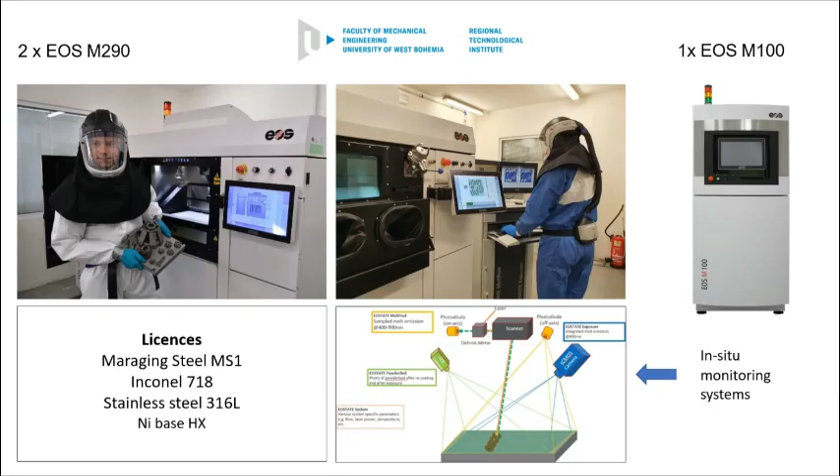We have a small international team in our research center, which is equipped with EOS equipment. We have open licenses for some metals. Our machine is equipped with in situ monitoring from EOS company, and we are developing our own in situ monitoring systems to understand the process more.

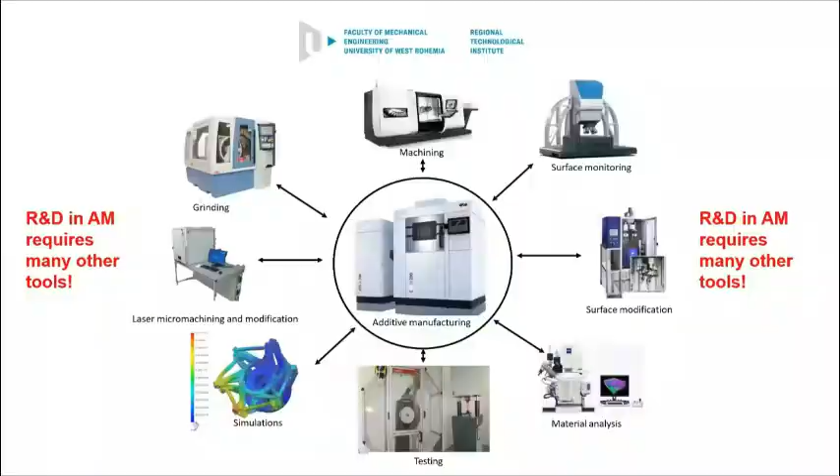For R&D, it's very important that we are able to collaborate with other labs in our RTI Research Institute, and we can collaborate on testing, investigating surface treatment, etc. Partnership is very important for us because our team is not too huge, and we need the collaboration.

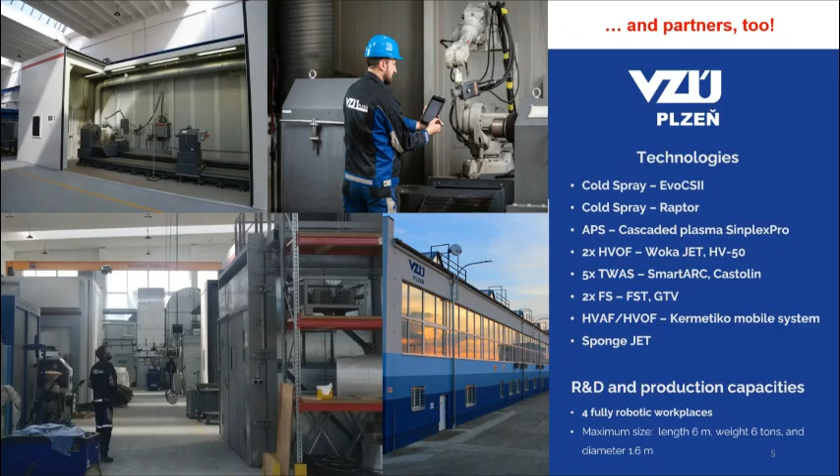Our local collaborating research institution is VZÚ Pilsen, translated as Research and Testing Institute. Pilsen is very well equipped for different industries, and one part of this is a department for thermal spraying, including all technologies for these processes, including the application of cold spray.

I will start with my idea. I tried to push to the European Commission because I think that some parts are or will be produced by additive manufacturing, and some of them will need improvement of surface for different reasons: to be harder, to be better in abrasion, to have some thermal barriers.

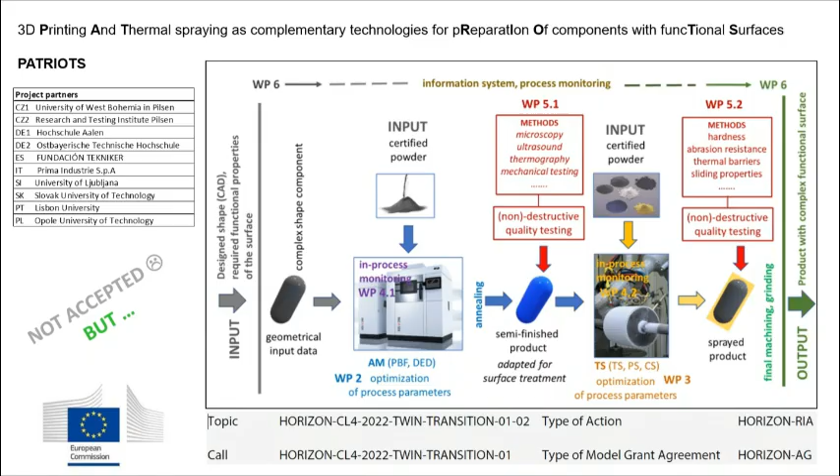The European Commission didn't accept our proposal, but we worked very hard on this topic, and we obtained money from a smaller European program, M-era.Net, with a smaller team composed of Pilsen, Germany, and Poland.

I will not comment on the result. You can find it on the website of this program and in some literature.

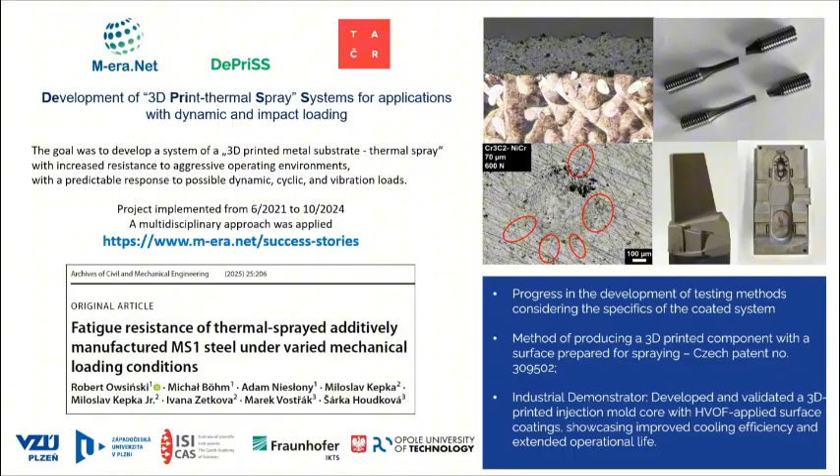Five years ago, Professor Nima Shamsaei from Auburn University visited us. We tried to develop some collaboration. We asked the Czech government for money, but the Czech government didn't accept our proposal.

But we used our internal money for this type of collaboration, and we performed investigation on Inconel 718, which was tested in fatigue, but test specimens had different various post-surface technologies we use at our RTI.

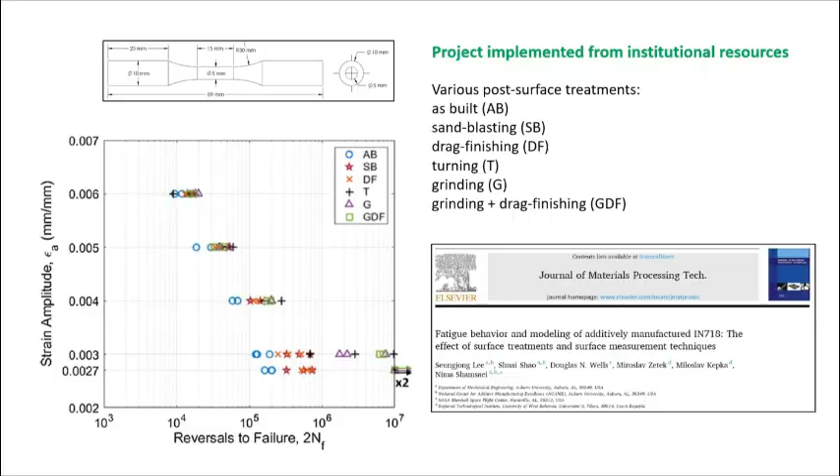In Trento, I discussed with Professor Nima that we would like to continue our collaboration. Maybe we will prepare something similar, an investigation, but with multi-axial loading.

Still, I think - not only I, but my friend Vladimir too - that multi-axiality is a very important aspect to investigate in additive manufactured components. Because to produce something by this technology and be economically in line with castings and forgings, components must have topological optimization. And a topologically optimized component will have a lot of notches, and some of them will be multi-axially loaded.

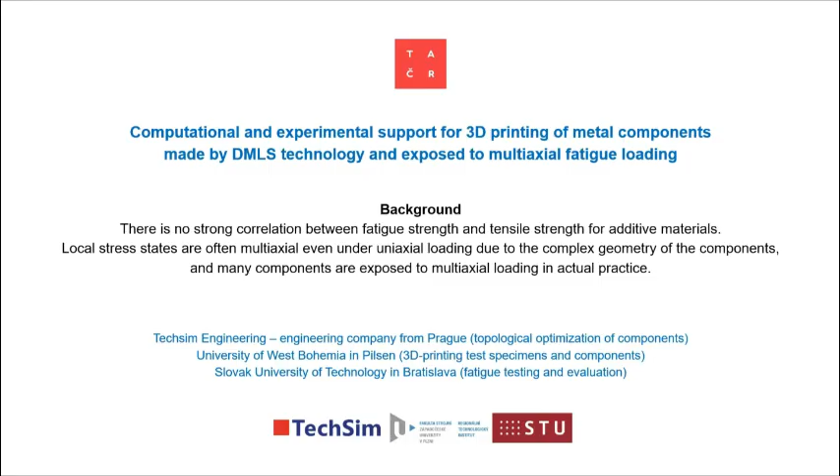We solved a small project together with the University in Bratislava. This workflow I showed, I think, 3 years ago in Porto, but we still haven't presented results in detail in any paper. Shortly, the project can be described as: we produced the test specimen, and tested the test specimen uniaxially, in torsion, and in different combinations.

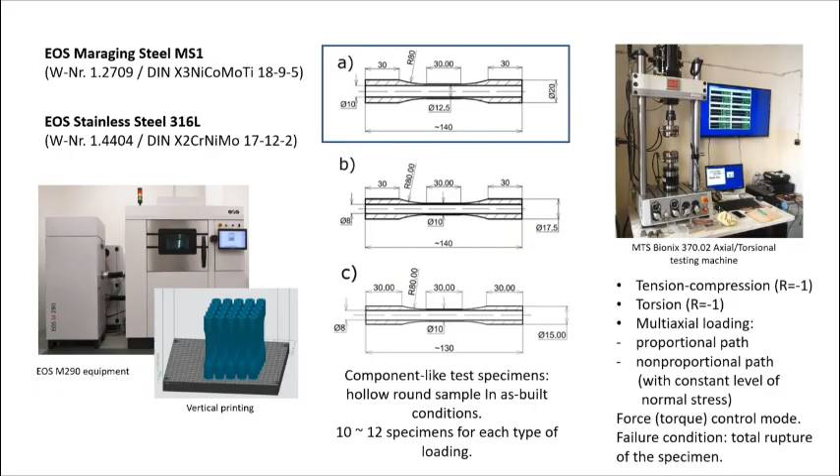Then we were able to compare experimentally and theoretically stated fatigue life and to evaluate different various multi-axial criteria, which are overestimating, underestimating, or in line with experimental results.

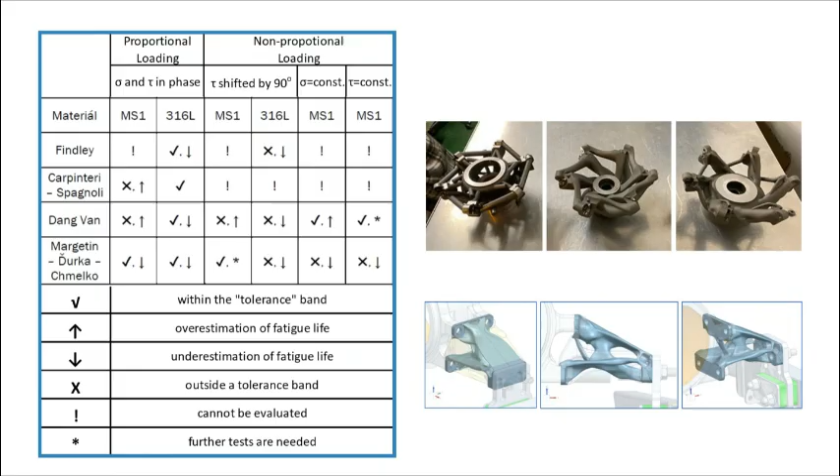Knowledge from the project we used with optimization of some industrially used components - some examples you can see in this picture.

Now we are preparing a lot of collaborations. I am preparing collaboration with Unisalerno. We will investigate the crack growth of CT specimens.

We are preparing collaboration with Uniparma. We would like to continue our project with Bratislava by testing the component, like test specimens, on our multi-axial test stand, and I hope that our friends from Parma will have the possibility to validate their new approach to multi-axial fatigue life prediction.

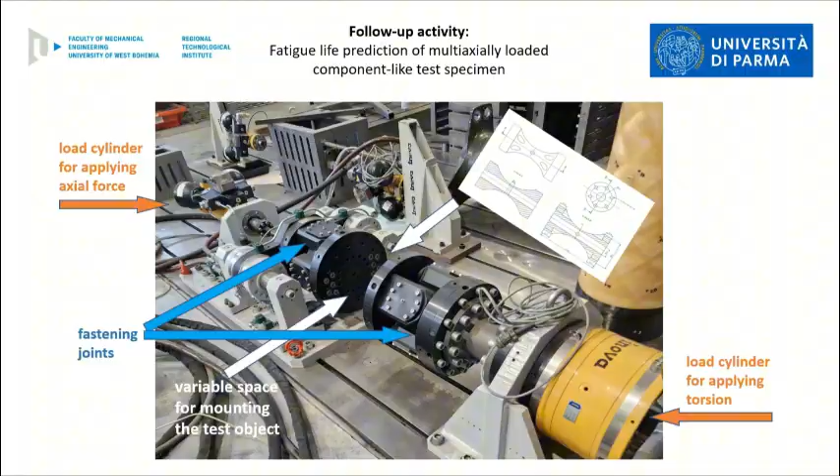And now I would like to ask my colleague to continue and to propose something.

Oh, sorry, this is not right.

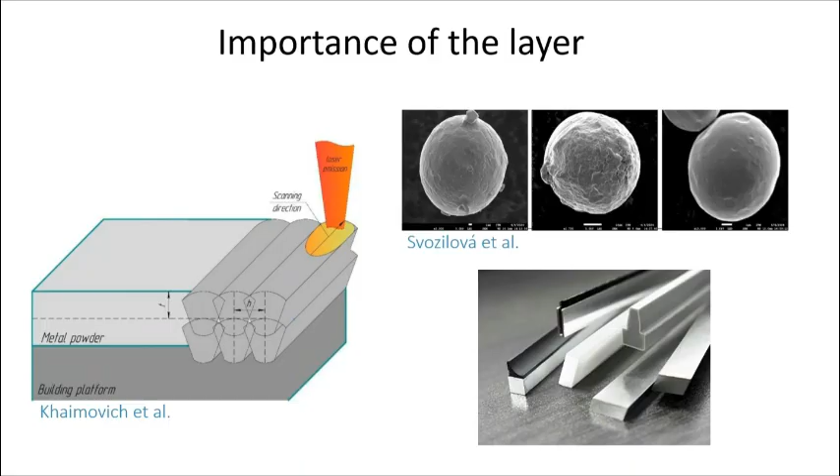As Mr. Kepka showed, we are using SLM machines where the quality of the printed part is given by several factors such as laser parameters and scanning strategies. There are differences when using new, used, or recycled powder, or when using hard or soft recoaters. This is all closely related to the field we are focusing on, specifically monitoring the powder bed, respectively monitoring the quality of the spread layer.

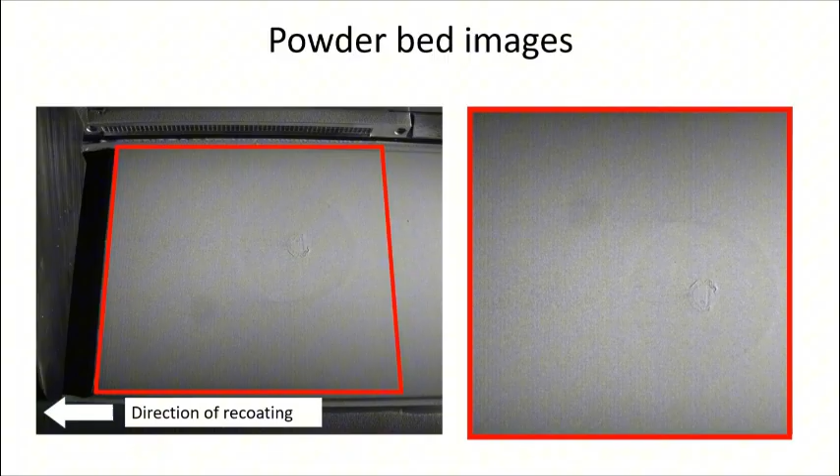In the following slides, I'll be using these images - basically top view cropped images of the powder bed. To make it clearer what we are working on, I will introduce some common defects occurring while spreading a new layer.

The first one occurs when the recoater is spreading the layer and hits some elevated part, resulting in vibrations that create patterns called waves - basically spots of thin and thick layers of powder.

Second, recoater streaking. This happens when the recoater blade itself is somehow damaged, when a small piece is chipped off, or when the recoater blade catches some debris or particle and spreads it along the platform.

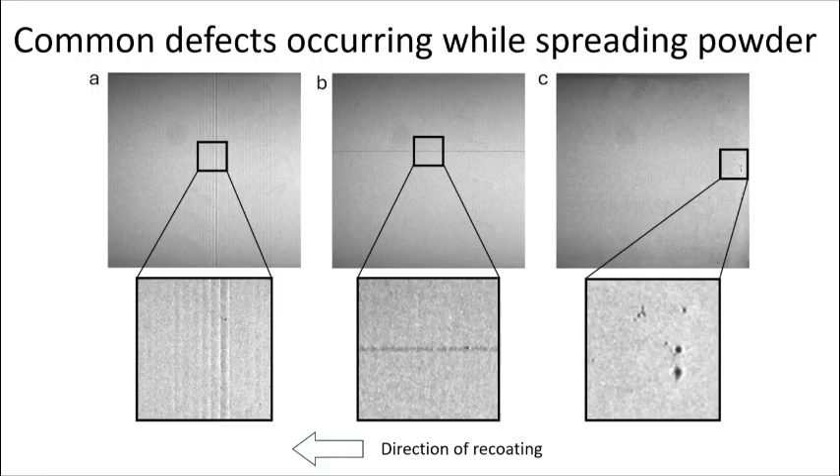And the last one - spots of missing powder - usually occurs on the edge of specific complex geometry. I also have an example.

So we decided to somehow screen or monitor this.

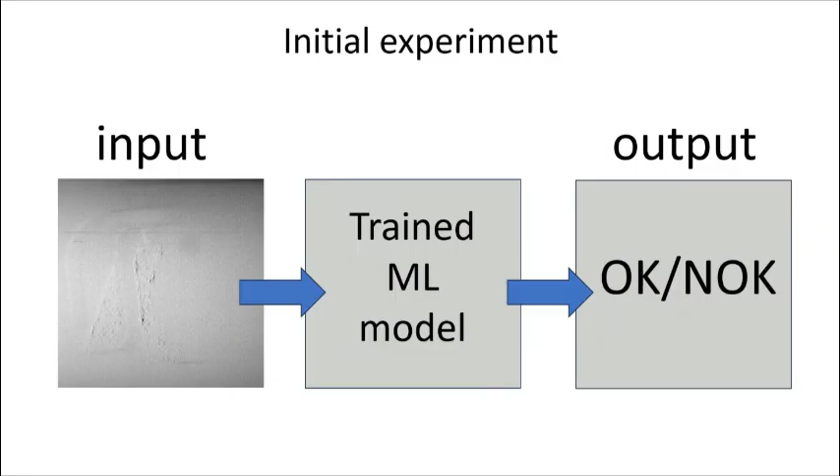In our initial experiment, we trained a model that performs binary classification of images. We have input images - these are images of the powder bed after recoating - and the model decides if the layer is well or not well spread. Here you can see some examples of well and not well spread layers.

We used in total over 2,000 images to train the model, reaching 97% accuracy. However, this approach doesn't count the position of the part on the platform, it doesn't count the position of the defects.

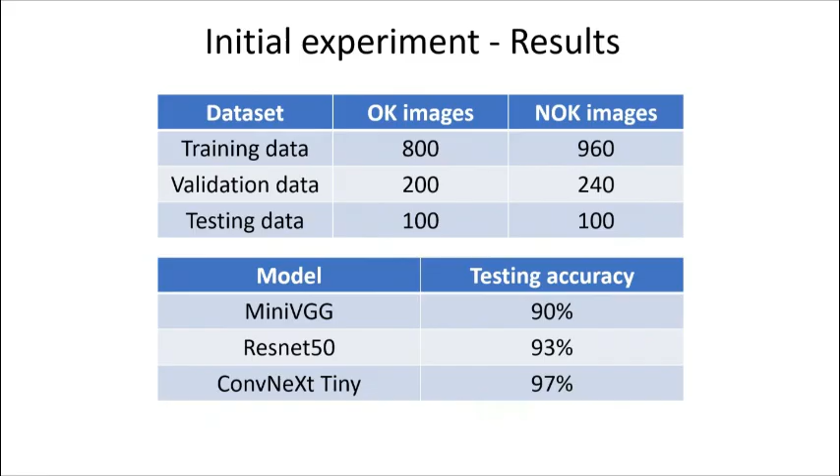So now we are currently working on defect segmentation, which will be much more useful in our future work. This basically highlights the defects and can also tell us more about the defect.

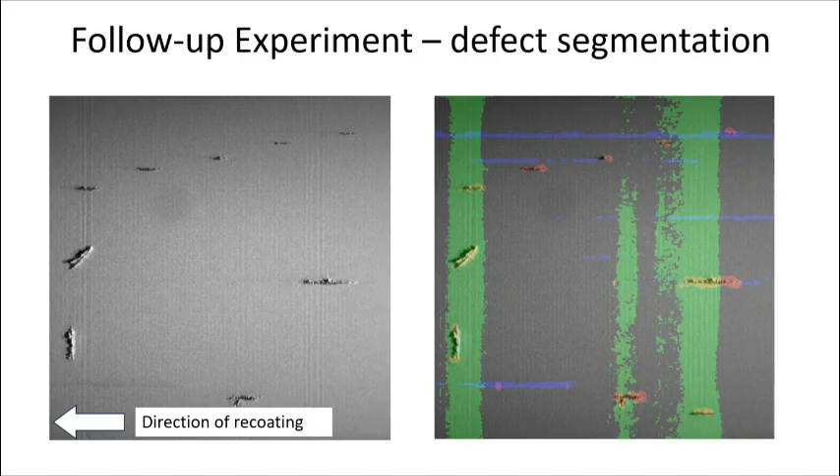We are also trying to implement other sensors, such as an accelerometer, to get more detailed information about vibrations while printing - I mean vibrations from the recoater.

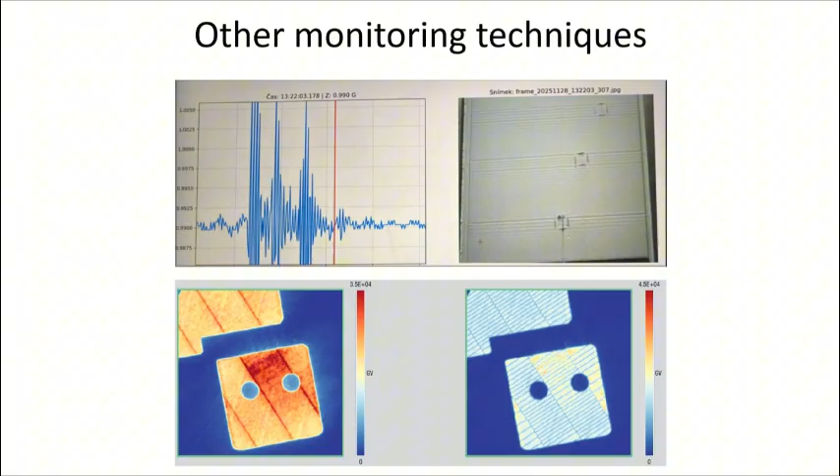We are also using optical tomography from EOS to monitor heat. That's a field of my colleague Yusuf Bakr, who I showed at the beginning.

For us, it's very important to connect these defects occurring in layers with the real defects in material, and how it affects the material.

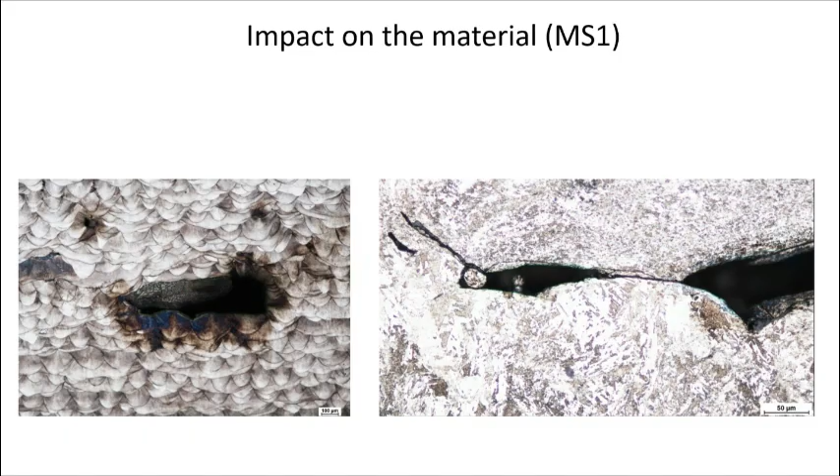The general aim of the project is to train a model that will somehow predict the defects in material based on the input data, which is mainly the powder bed images, other sensors, and the optical tomography.